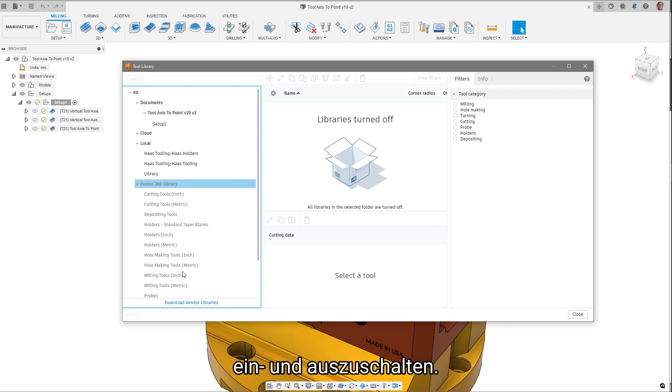The tool library has been enhanced with the new feature allowing for libraries to be toggled off and on using the context menu. By turning off unneeded libraries, less data is loaded, increasing its performance. Once switched off, this setting will stay set, and the library will not be available until needed, at which time you may toggle it back on to be used.

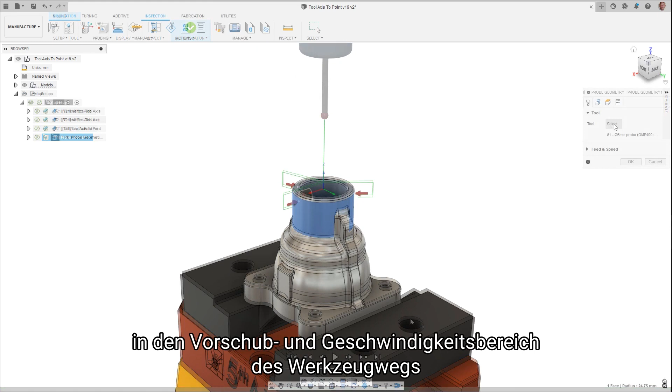Greater probing efficiency can now be had with the ability to assign feed rates to different types of movements. Previously, a single value could be input into the feeds and speeds section of the toolpath, or the cutting data of the probe in the tool database. This has been expanded, allowing you to assign individual feed rates for the link, lead-in, and measurement movements, giving you greater ability to optimize your probing sequences for shorter overall cycle times.

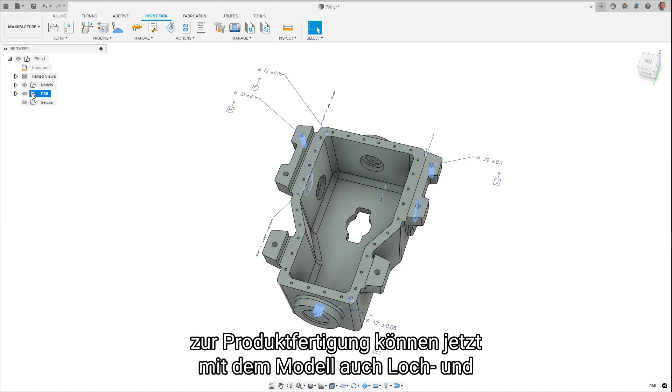When using Inventor and STEP CAD models containing product manufacturing information, hole and boss information can now be uploaded with the model as well. Data contained in this information, for example hole tolerances, can then be used in inspection workflows.

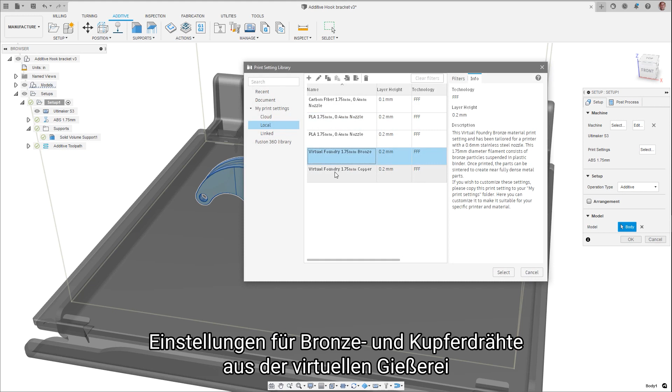Filaments for FFF 3D printing that contain metal particles, which can then be post-processed to create a denser part, require different parameters for successful printing. Settings for bronze and copper filaments from Virtual Foundry have now been added to the Print Settings library.

When editing print settings, finding parameters can be a tedious process with endless searching. The Print Settings editor now contains a search field. Start typing in your desired setting, and possible options are shown. After you've selected your setting to edit, the correct field is automatically highlighted to allow for quick identification.

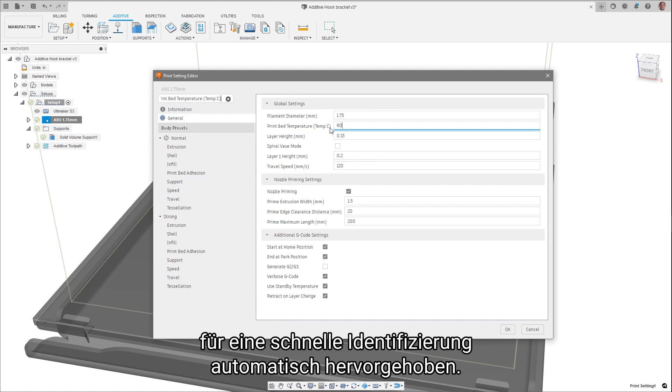Converting volumetric lattices to mesh bodies in order to additively manufacture them not only breaks history-based modeling, but can be a time-consuming process. It is now possible to directly add your part into an additive manufacturing setup without creating a mesh as before. This prevents data loss, errors, and improves your overall performance in projects.

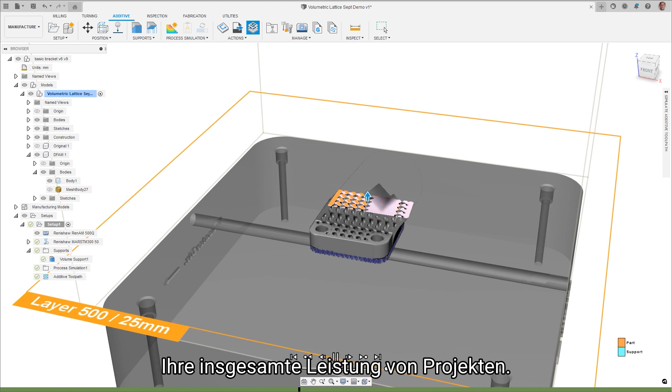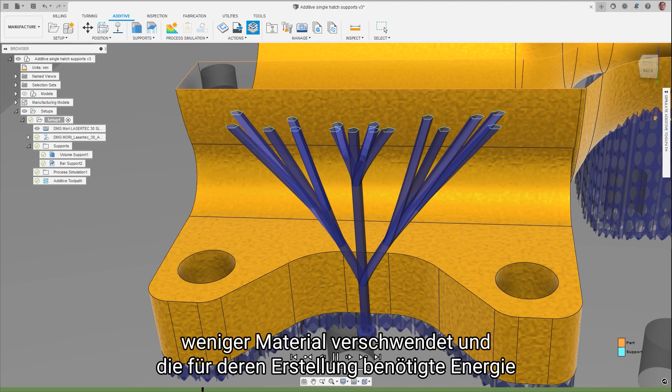Supports are needed in most additive builds to be successful, but are time-consuming and can be wasteful. The additive build extension now includes a new bar support shape to aid in this. Single hatch tube supports create the support with a single laser pass, creating a hollow structure, which decreases the build time, wastes less material, and reduces the energy needed to create them, while still supporting the part for a successful build.

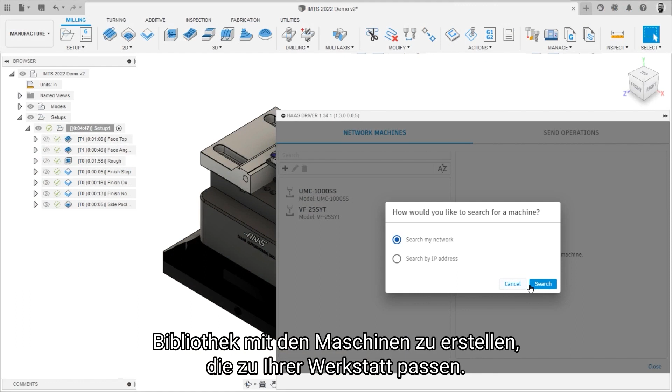Two new add-ins have been added to the App Store to increase productivity when using Haas and Mazak machine tools. The Haas driver add-in automatically finds all Haas milling machines with an NGC controller, and enables users to quickly build a Fusion 360 machine library with the machines to match your shop. This add-in connects directly to the machine and automatically checks the machine configuration and settings, helping to reduce costly mistakes where running the wrong NC code can result in wasted time and material or even crashes.

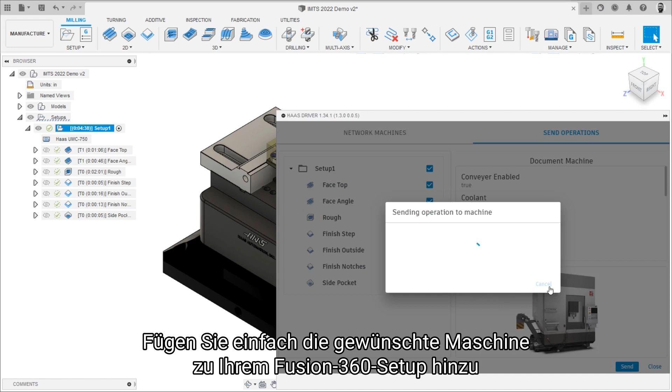There is also no need to maintain a library of post-processors or find the right machine folder to send the NC code. Just add the machine you want to use to your Fusion 360 setup and send NC code directly to the machine using the Haas driver.

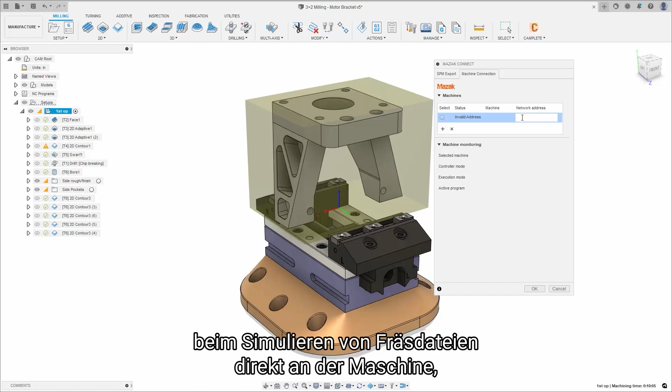The Mazak Connect add-in enables your CAM programmer to export Fusion 360 project files directly to Mazak's Smooth Project Manager, which synchronizes and manages all the data required to execute machining programs, including tool data, fixtures, system coordinates, parameters, and 3D models. By sending this information to the manager, the machine operator has greater accuracy when simulating cut files directly at the machine to check for errors.

The add-in also establishes a direct connection to any Mazak machine, allowing the user to see the availability status, whether it be running, idle, or offline. Using the Mazak Connect add-in, your CAM programmer and machine operator can work in unison to verify cutting files and optimize production, while saving time and reducing costly mistakes.

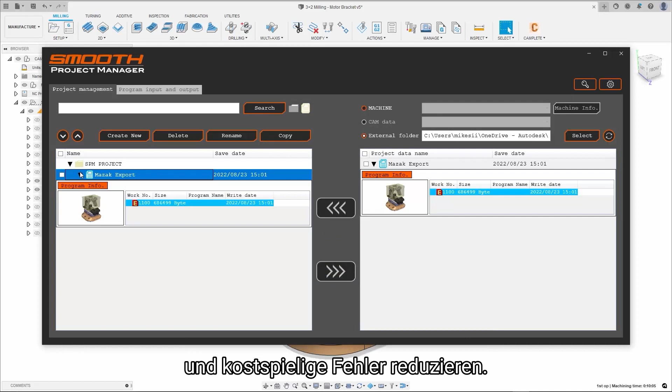There are new pre-release features available in this release as well. A quick reminder here that these features need to be turned on in your preferences to allow you to test their functionality. Feedback on them is always welcome in the Fusion forums.

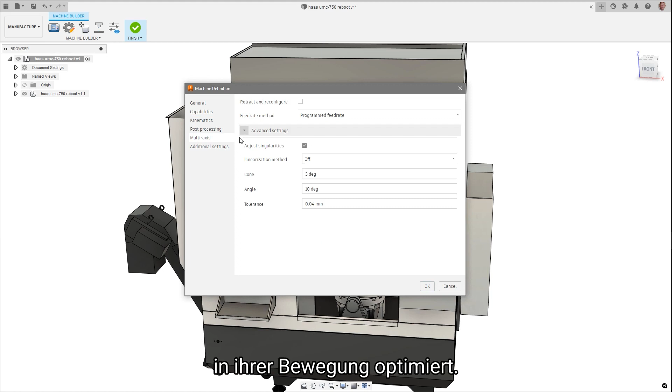Machine tool simulation has seen improvements with the redesign of the dialog form, streamlining the process when describing a machine tool in its motion. This paves the way for further functionality, the first being included in this release as well with the ability to describe machines with more than 5 axes of motion.

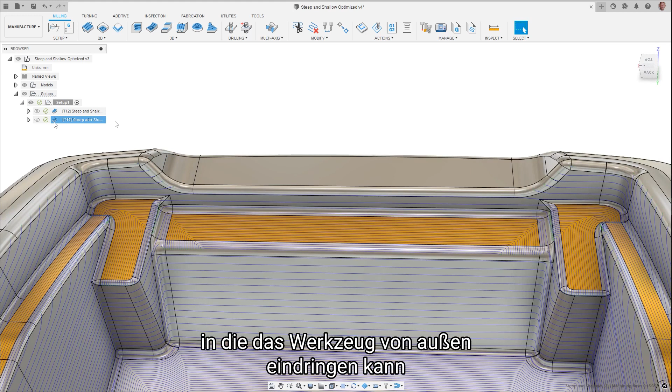Steep and shallow has gotten even better with the addition of the option to optimize open pockets and shallow regions when using a scallop toolpath type. Some part features may contain shallow areas where the tool is able to enter from the outside, and may benefit from doing so. In these cases, the new Optimize Open Pocket option can generate a scallop toolpath for shallow regions with a shape that is influenced by the surrounding steep region, while also aiming to enter and exit the material from the outside in.

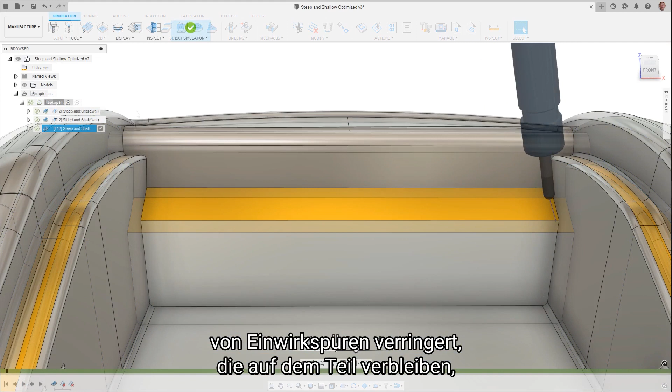This new option produces a toolpath with open passes that tend to have fewer changes in direction, reducing the likelihood of dwell marks being left on the part, helping improve surface finish. This new option can also reduce full width cuts, meaning better tool life.

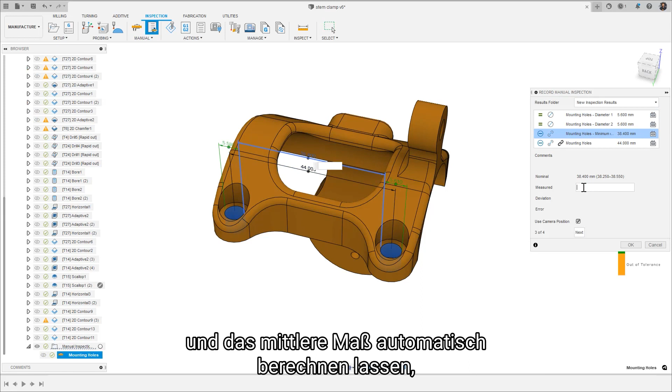In the July release, the ability to measure between two holes was added to manual measurement. In this release, it has been further enhanced to add maximum and minimum measurements. This allows you to easily measure the inside or outside distance between two holes and have the center measurement automatically calculated, increasing the flexibility of its use.

Calculating the build cost of an FFF print is simplified with a new estimator located in Print Statistics. By inputting your kilowatt per hour and filament costs, print build energy consumption and manufacturing costs are calculated, allowing you to make informed decisions.

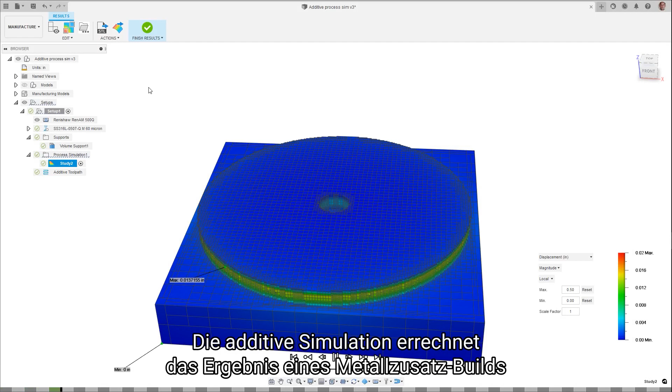Additive simulation calculates the outcome of a metal additive build, identifying potential issues of part warpage. This warped model can now be exported to validate simulation results and used in potential downstream secondary machining operations.